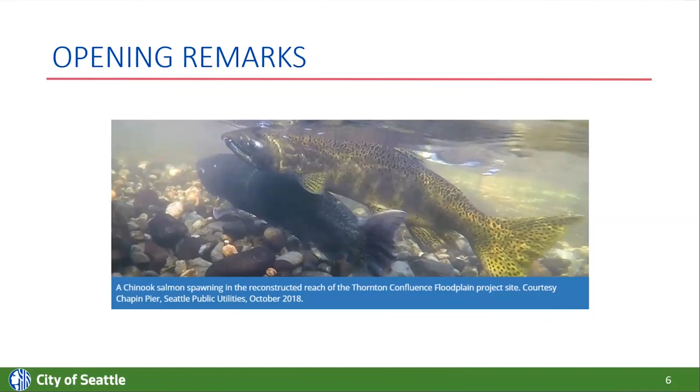All right, sounds good. We always like to start off with a little background on why we even have a stormwater code and what's in the current stormwater code. Those of you who joined us at the external code and manual user meeting back in the fall may recognize this slide. Looking at why we have a stormwater code in place, the key goals are protecting life, property, and surface waters from harm, and meeting the requirements of state and federal law.

This is a requirement under the Federal Clean Water Act, and in the state of Washington, our municipal National Pollutant Discharge Elimination System stormwater permit. Some of the key things included in the stormwater code and manual are source control for ongoing practices, construction site pollution prevention, and requirements for new development and redevelopment, which include on-site stormwater management, flow control, and water quality treatment.

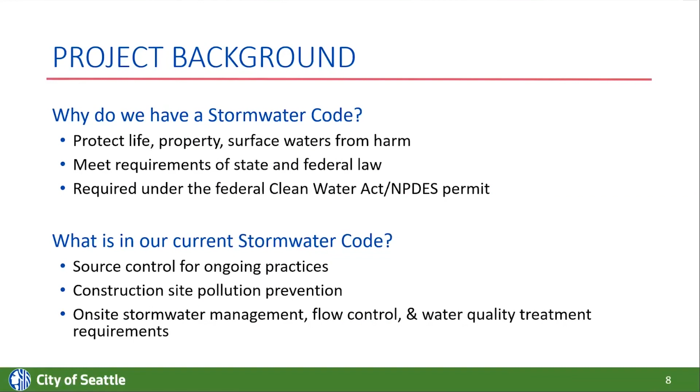One of the main drivers for this project is the new Phase 1 permit that was issued on July 1st, 2019 - I guess not so new anymore, but relatively new. It became effective on August 1st, 2019. There was also an update to the Stormwater Management Manual for Western Washington, or what we call the Ecology Manual, along with that reissued permit, posted in July 2019.

We held a series of internal city staff workshops and meetings in the summer and fall of 2019, and then had our external stakeholder code and manual user meeting last fall, which some of you attended back in October. This spring, we have two virtual public meetings. As Sherelle mentioned, today is the first of the two public meetings, and the next one will be next Wednesday, May 6th.

So the project is divided into four different phases, and we're working through the first phase of the project right now. As Sherelle mentioned, we're focusing on the required equivalency items and getting things ready for Ecology's review.

That review period starts on July 1st, so we've got to wrap everything up in the next couple months and get that ready for ecology's review.

The key thing here is looking at Appendix 10 of the Phase 1 permit and addressing any items related to ecology permit equivalency. Those include things such as new source control BMPs, updates to construction stormwater elements to reflect the 2015-2020 construction stormwater general permit, updated wetlands guidance, etc. So there's a few items there that are required changes in the ecology permit.

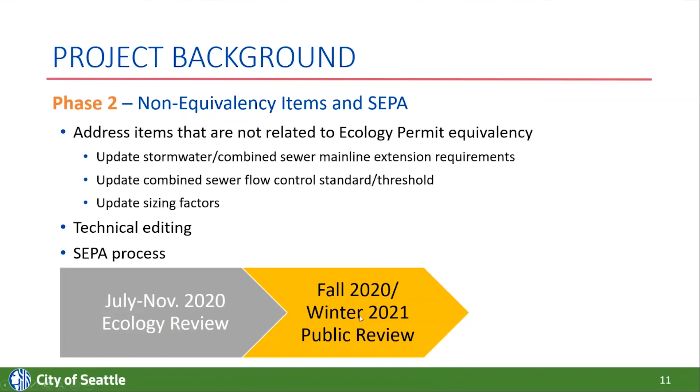Hopefully they'll get us comments back before then, but then it'll be out for public review once we're able to review ecology's comments and incorporate those new phase 2 items. There'll be a second public review period that you can also participate in, and we'll mention that again towards the end of the presentation, but that'll be either late fall or early winter, depending on when we hear back from ecology.

Phase 3 and phase 4. Phase 3 will be the legislative process and adoption, occurring in the spring of 2021 - taking things through city council review, having public hearings, things like that. Phase 4 will be looking at implementation tools. We're working on that throughout the project, identifying what types of tools would be helpful to support the manual, applicants, and plan reviewers. Those will start rolling out in the spring and fall of 2021.

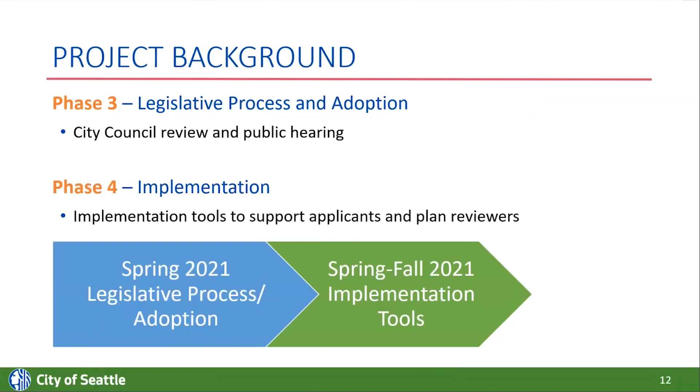Thank you, Rebecca. I just wanted to note one thing, and I apologize if you're going to go through this bit. We were talking about the time series and changing possibly the time series for the modeling, and that would possibly affect the sizing factors in the manual, but you can touch on that more later. I just wanted to make sure that we covered that.

Anyway, I am going to go over the key stormwater code changes. I'll just remind you that the authority to regulate stormwater in the city of Seattle comes from the Stormwater Code, and that's why we're starting with the code. A lot of the code is inserted into the Volume 1 manual, but the code, the Seattle Municipal Code, is where the authority is, so should refer to that if you're looking for something in particular that isn't in the manual. The Stormwater Manual, which is the director's rule, further interprets the authority in the code.

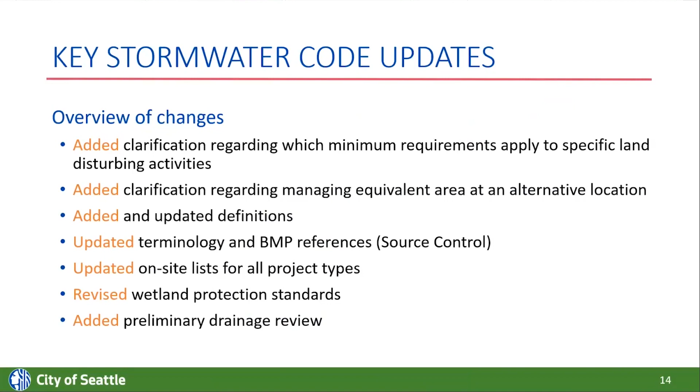As far as the title, scope, and authority goes, we've had to remove barriers to some of these retrofits or projects that are either improving water quality, flow, or removing pollutants. We've added some new exemptions from the minimum requirements for remediation projects, as well as stormwater retrofit projects.

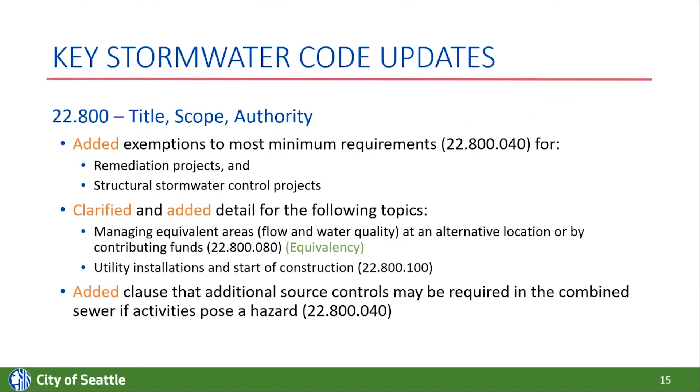In addition, we've updated this to note that ecology is asking us to add some additional language regarding alternative compliance, so we've updated that section for equivalency to ecology. We also added some clarification regarding utility installations as it relates to start of construction, and updated that source control may be required in the combined sewer area for certain activities.

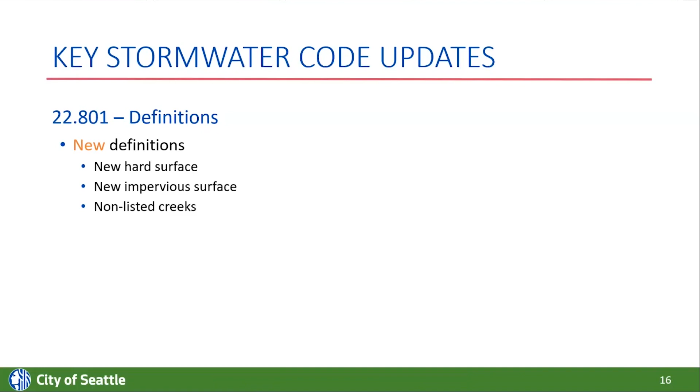So as far as definitions, I'll first go through the new ones and then the revised ones. We have added new hard surface and impervious surface definitions to be consistent with ecology, and that incorporates changing surfaces from gravel to asphalt being considered new. We also added non-listed creeks as a definition, just to be consistent in the manual, or in the code, because we have listed creeks as a definition.

We've updated several existing definitions. One is the definition for aquatic life use. Currently it has only freshwaters considered as having aquatic life use in our definition, but we've added marine waters to the definition, which will affect enhanced treatment requirements. We did a minor name change in the construction stormwater control plan definition.

We've added a definition for development, and the changes are to be consistent with ecology's definition, including adding subdivisions and short plats, and noting that development is a type of project.

We've changed effective impervious surface to effective hard surface. We changed master use permit - there was a definition in the stormwater code that was slightly different than what is in the land use code, and instead of having a separate definition, we're just referring to the land use code.

We also updated pollution generating impervious surfaces, with changes having to do with pedestrian ways being separated from drainage or from roadways, as well as making it clear that rail lines, including light rail, are also considered pollution generating. In addition, we clarified that if you have an area that is pollution generating that isn't currently going to a drainage system, but that is replumbed one way or another and goes to a drainage system, that is considered new pollution generating surface.

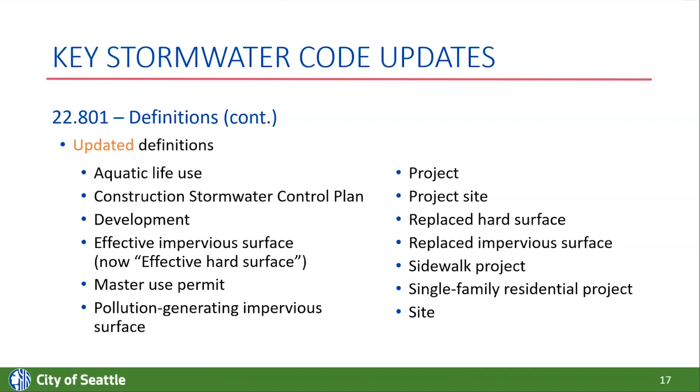For the definition of single family residential project, we added clarification that associated detached accessory dwelling units are still under the single family residential project definition. And finally, for site, we made changes to be consistent with ecology as well.

For minimum requirements for discharges, all discharges on all real properties - I first want to note that there's no changes to the prohibited and permissible discharges proposed, but for 22803, we do have a couple changes.

We added new BMPs for source control for all real properties that include rooftop dog runs, fueling associated with dedicated stations, mobile and in and over water fueling, maintenance and repair of vehicles and equipment, and concrete and asphalt mixing, production, and pouring, and a couple minor name changes in that section as well.

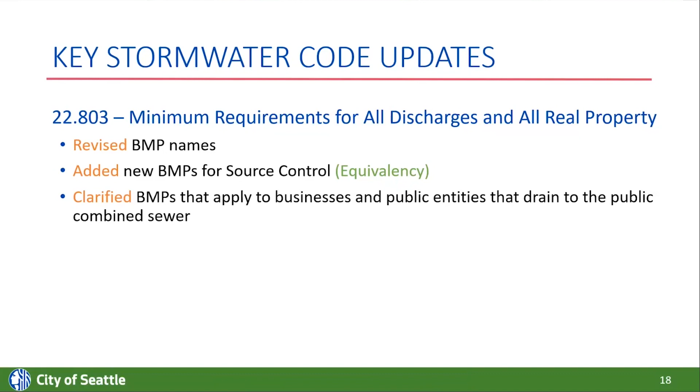As far as the overall minimum requirements for all projects, for general requirements, there's a new section related to closely related projects that may be determined to be one project if they meet certain thresholds. This mirrors other code language that is in Seattle Municipal Code, in particular evaluating SEPA and drainage review, design review.

We also added a new section clarifying drainage control plan review, making it clear that it is required for MUPs, and also looking at the entire project to determine thresholds. Additionally, we added that for certain stormwater facilities that serve multiple properties, there are requirements for those to be built ahead of those further projects being finalized.

The last two items that I just mentioned, Matthew will discuss in more detail, along with two changes in the single family, or changes related to on-site stormwater management.

In the single family project section and the parcel-based project section, the terminology when a lot size is changed has changed from reduced to altered. Other thresholds were added to be equivalent to ecology's requirements about increasing runoff during the 100-year recurrence interval flow frequency, and finally there are requirements associated with protecting wetlands, updated based on equivalency requirements from ecology.

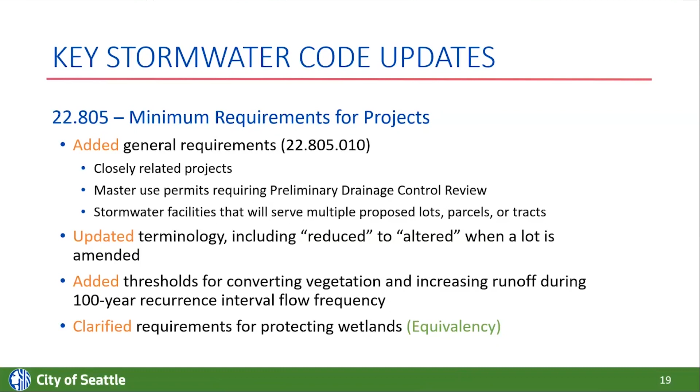For roadway projects, the proposal is to change the flow control thresholds to be based on new hard surfaces instead of replaced hard surfaces. This would match ecology's requirements.

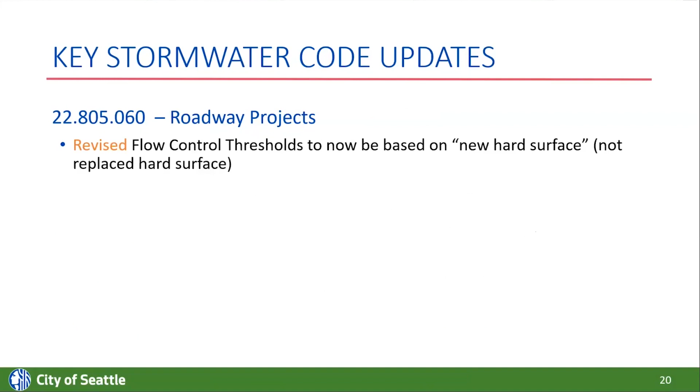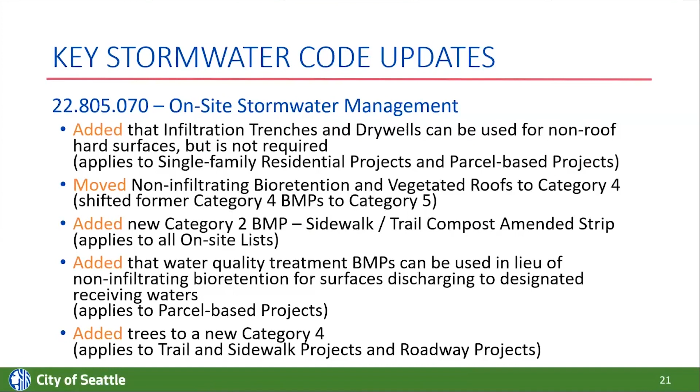Related to on-site stormwater management lists, I'll go through these quickly, but I also have tables I'll follow through in more detail. Some of these changes affect all of the lists, with changes to categories and BMPs, including adding a new sidewalk trail BMP, as well as adding trees to roadway and sidewalk trail projects as a requirement to be evaluated for the on-site stormwater management list.

This is a screenshot of the parcel-based project list, and I've highlighted in green the changes in the words I just went over on the other slide. Basically, for infiltration trenches and dry wells, it now says that for surfaces, you can use them, but you're not required to evaluate them for surfaces.

So if somebody wants to, because of pollutant concerns and the like, or long and linear projects, the requirement to evaluate for surfaces is optional as opposed to a requirement. This is consistent with ecology's requirements, and that's for ground level surfaces as opposed to roof surfaces.

Yes, thank you for clarifying that, Matthew.

For sidewalks in category 2, we added a sidewalk trail compost amended strip. This is basically similar to the CAVFS that WSDOT uses - I apologize for the acronyms - but it's a compost amended strip for trail and sidewalk projects, and it's on the same level as permeable pavement.

So this is something we need to take to ecology for approval. This is definitely proposed, but you'll find that BMP in the manual in volume 3.

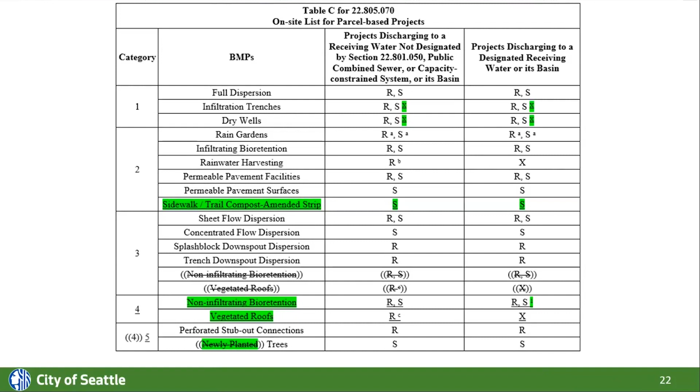And just to see what this means for roadway projects - this also would apply to trail and sidewalk projects - similarly adding that sidewalk trail compost amended strip in the same category as category 2 and permeable pavement. Again, this has not been approved by ecology. Also, at the bottom, we're adding trees to the bottom of the list for roadway projects and trail and sidewalk projects.

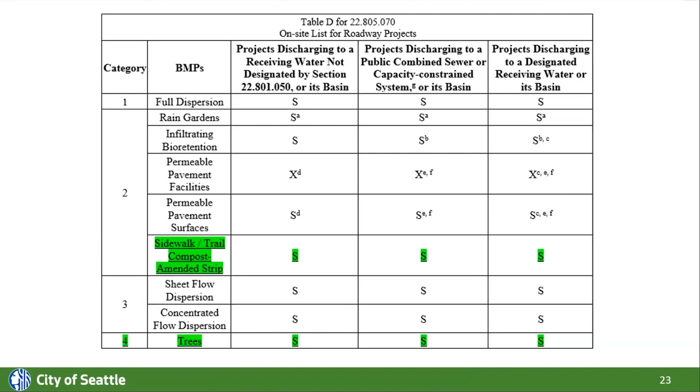So, to meet equivalency, we added requirements for wetlands based on ecology's equivalency requirements.

Most of these requirements would have to be determined by wetland biologists through a wetland report. The reason we did this is because ecology has a new method of determining what type of flow control and monitoring is required, and it's dependent on different types of class and type of wetland, habitat and habitat score, and the presence of breeding amphibians - all from ecology.

Depending on what type you have and different parameters, you might have to do method 1 or method 2 flow control. Method 1 flow control involves a year of monitoring, including wetland stage modeling, and it typically applies to class 1 or class 2 wetlands, and it has to be a depressional or riverine impounding wetland. The project proponent basically has to have legal access to the wetland to be able to do the monitoring.

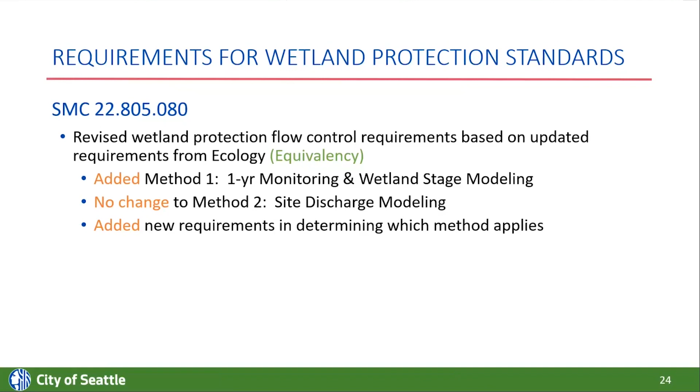And I'm almost out of time, or I'm out of time, so I'm going to hurry through this. And I think that I have my last slide here.

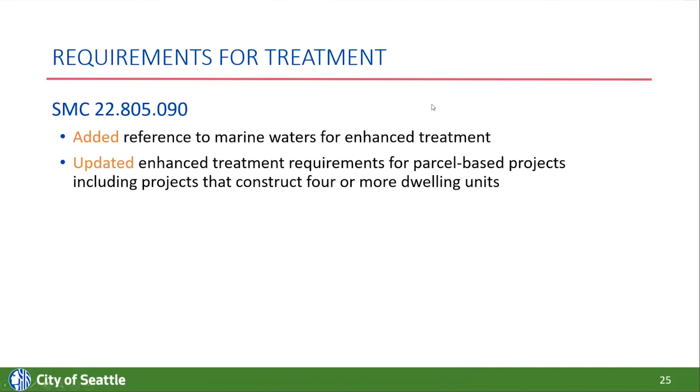So, okay, I think that is it. Thank you so much, Sherelle, for the update. Oh, I have one more. I apologize. Okay. Sherelle, you're doing fine on time. I have you at 15 minutes right now, so you're good. Yeah. Oh, okay. Okay, good. Good. I thought, never mind.

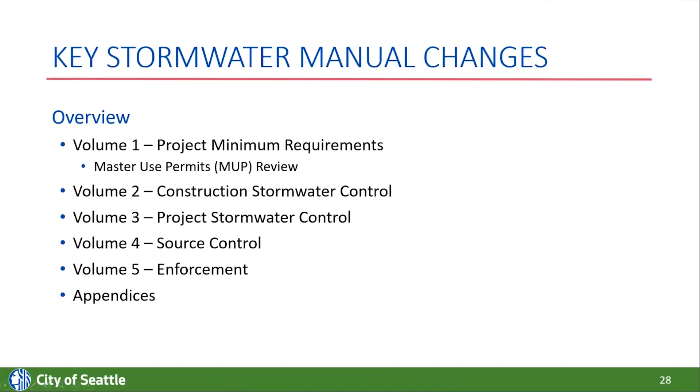And then the appendices. And Matthew will be speaking a little bit on master use permits as part of the Volume 1 update today. So some of the key changes in Volume 1, if you've had a chance to take a look at that summary of changes that's posted online along with the Redline manual files, that provides a pretty good overview, but just wanted to hone in on some of the key things that have been updated or clarified or added.

So as Sherelle mentioned, this kind of aligns with what's in the code, so clarifying definitions and providing some new examples for single-family residential, parcel-based projects, and special circumstances projects. So that expanded some of the text related to special circumstances projects in section 4.7. So if you're developing multiple blocks, if you're discharging to closed contour basins or multiple drainage basins, or discharging to subbasins within the public combined sewer system, those would now be considered special circumstances projects.

Also consolidated the requirements for land disturbing activities. So these were different project types back in 2016, and they've kind of been rolled up into one section now. So that includes utility projects, pavement maintenance projects, and then a couple new sections on remediation projects and structural stormwater control projects.

And then right now, there's a placeholder for the landscape management plan. So for those of you that are familiar with the King County Surface Water Design Manual, that section is kind of modeled after what King County has in their manual. So that's up for Ecology review as a proposed change in section 5.4. We also added a reference to BMP T5.40, preserving native vegetation. That's in Ecology's Stormwater Management Manual for Western Washington.

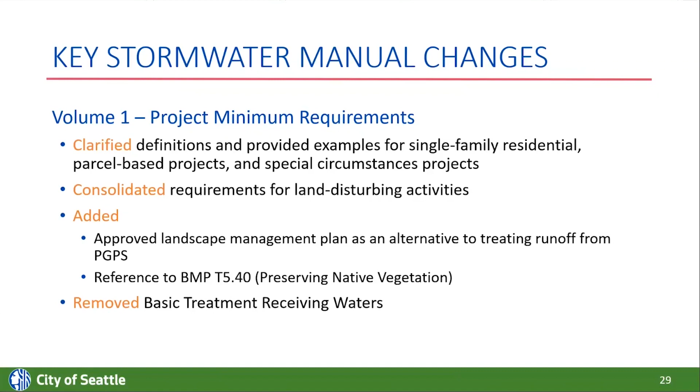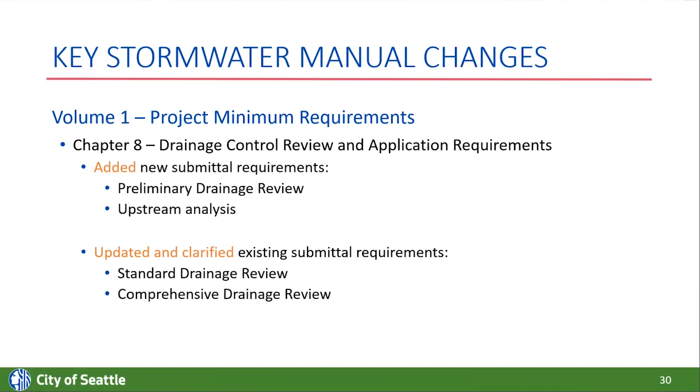In Chapter 8 specifically, a couple things that Sherelle mentioned during her presentation, related to drainage control review and application requirements. There's a new section 8.1 on preliminary drainage review. And then there's a new requirement in section 8.4 related to upstream analysis. And we've also updated and clarified existing submittal requirements in sections 8.2 and 8.3 related to standard drainage review and comprehensive drainage review. And Matthew can definitely speak to questions on those since he worked on Chapter 8. So with that, I will hand things over to Matthew to give us a brief overview on the master use permit updates in the draft manual.

Okay, so master use permits are basically just a land use permit issued by SDCI, and there's a huge range of what that permit may be. It could be a short plat, a major institutional master plan, or it could just be a sign approval. Our current code just says that MUPs require drainage review, so we wanted to provide some clarification and provide consistency of which MUPs get review, how you review them, and clarify some of the requirements.

So we've added this new preliminary drainage control review section that applies to MUPs. And we're going to clarify exactly what types of MUPs will regularly get drainage review. And we're also establishing some requirements for shared drainage facilities in subdivisions and short plats. Go to the next slide.

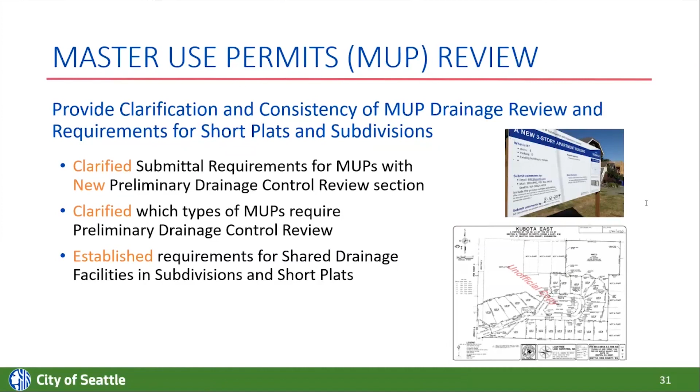So the preliminary drainage control review. We've got it in the code section here and the manual. So basically, you're going to need a preliminary site plan and preliminary drainage control plan. And that plan needs to include an estimate of all your hard surface coverage in the associated development. And that's what will be used for determining your thresholds for flow control, water quality, etc. And if applicable, a preliminary drainage report. Since there are a lot of different types of MUPs, we're planning on doing an appendix that would get into more detail for the different types of MUPs and what's expected.

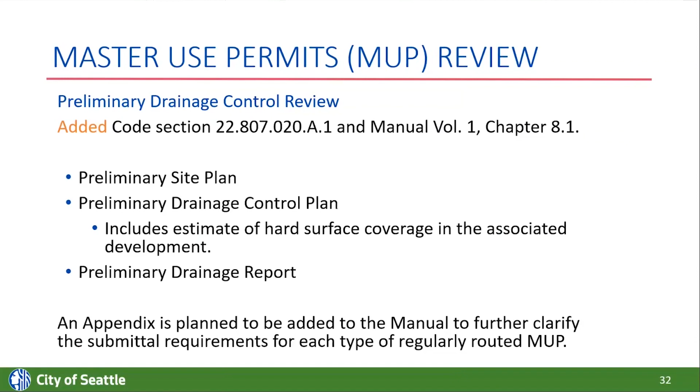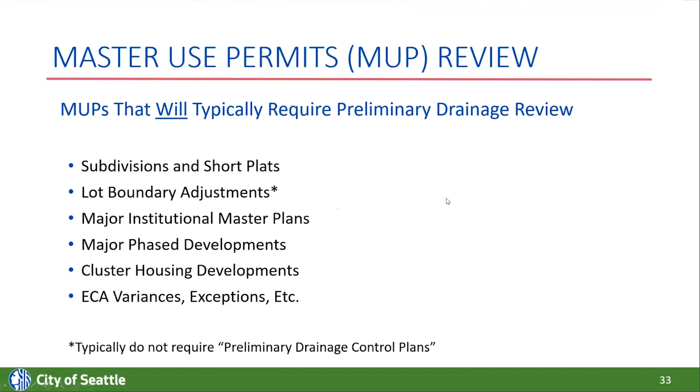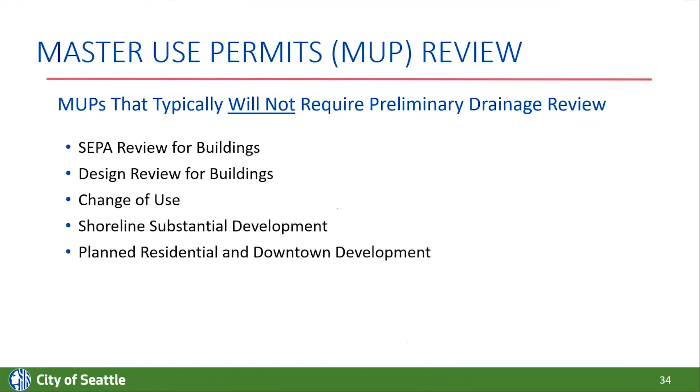And that's mainly just to make sure that huge subdivisions aren't split up and then sold off, and then people find out, oh, they can't do anything until they build this massive detention tank. And so that sums up my part of the MUP, and I can take more questions later.

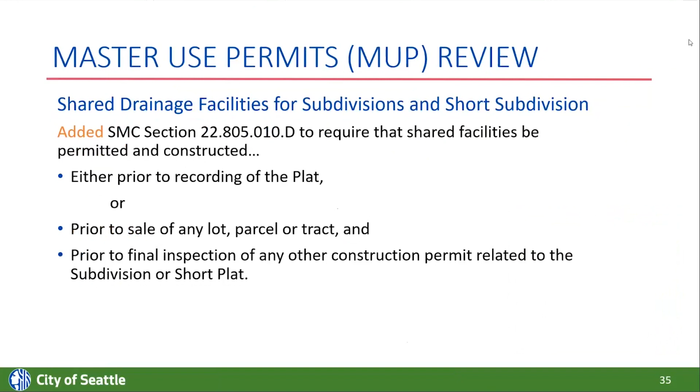Great, thanks, Matthew. So now I'll shift to talking about the Volume 2 updates. So Volume 2, the updates were relatively minor. A lot of those were related to terminology consistency and minor BMP revisions for consistency with Ecology's Stormwater Management Manual for Western Washington. If you're interested in specifics, you can take a look at that summary of changes table that I mentioned that's posted along with the manual red lines, and pages 6 through 8 focus on the BMP revisions.

I guess the one larger one was the split of 2 BMPs, so concrete handling and concrete washout area were lumped together in the previous manual, and those were divided out for consistency with Ecology. So those are now C 1.56 and C 1.58. Along with Volume 1, there were also updated internal or external web links and other minor terminology updates and clarifications throughout Volume 2, but relatively minor changes there.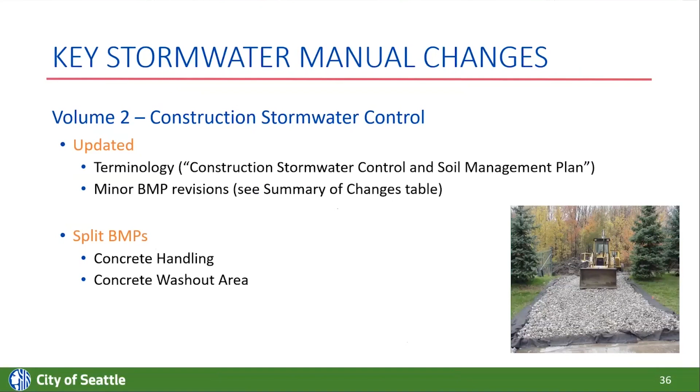Volume 3, some of the key things that were updated included some guidance related to the infiltration investigation map. So there was some confusion on how that might be applied. So in section 3.2, some clarifying language was added there to describe how that should be applied. Bypass flow through and offsite flow general design requirements for online and offline BMPs. Those are clarified in section 4.2, and some updates have been made there.

We added some modeling guidance for projects that are located in closed depressions, and that can be found in section 4.1.3.4. And then, as Cheryl mentioned earlier, there's the new BMP in chapter 5, sidewalk and trail compost amended strip. So that's something that's proposed to Ecology that we're hoping to get adopted.

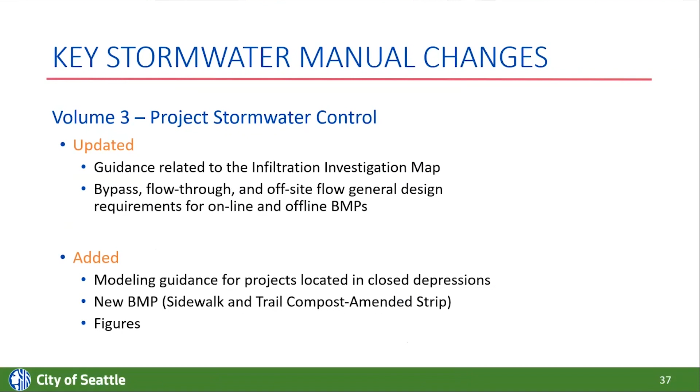And then figures are listed here under added, but there's also updated figures as well. So that should probably appear in both categories, but there's a set of red line figures that are posted primarily in chapter 5 of volume 3, and you can take a look at the changes that are proposed there. They're in the red line format, so they're a little messy now, but in the final manual, they'll be cleaned up in CAD and they'll look a lot nicer, but this way you can tell what's being proposed for changes.

Clarifications in Volume 3 include the minimum investigation and testing requirements for shallow infiltration BMPs. So Table 3.1 has some updates in it. Also some clarifications to how you would implement the on-site list approach in Section 3.3.1, the on-site performance standard in 3.3.2, and flow control in 3.3.3. Some clarifications on the modeling approach in Chapter 4 in Section 4.1.3. And then clarification on pre-settling and pre-treatment requirements in Section 4.4.

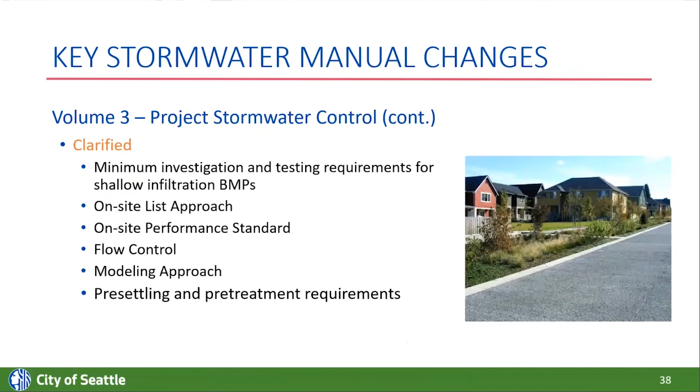The next 3 slides are just intended to be an overview. There were a lot of changes made throughout the BMP sections for clarification and terminology and updates to design criteria. You can take a look at the summary of changes table, page 9 through 13, for more information. The next 3 slides just highlight where some of the changes are, in columns: site considerations, design criteria, modeling guidance, operation and maintenance, and figures.

The second subset of BMPs is listed here. Again, lots of changes throughout the design criteria for clarification and updates, changes to the figures and O&M were some of the key areas here.

For detention pipes, we wanted to call out specifically a few changes you may want to take a look at. We clarified what is required for manifolded detention pipes, so minimum 24-inch diameter connections - you can take a look at that on page 5-160. The access requirements for detention pipes and any underground structure have been updated throughout Chapter 5, so there are new and updated requirements there, and also requirements related to exfiltration testing for detention pipes, under the minimum construction requirements on page 5-162.

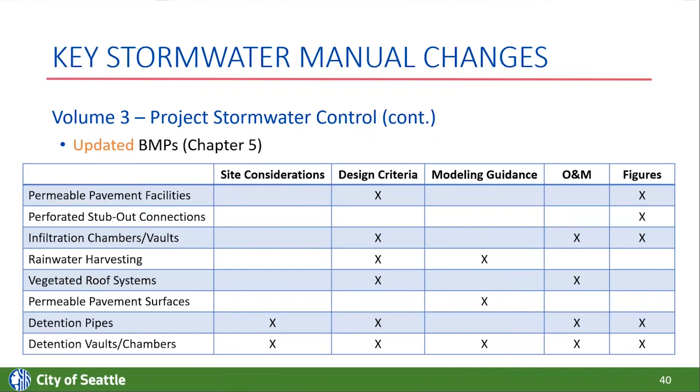On this third slide, the subset of BMPs we have are kind of the water quality treatment or non-infiltrating BMPs. Changes in the site considerations, design criteria, and figures were the main aspects here. For non-infiltrating bioretention, we wanted to highlight that a liner is now required, so that's a section you may want to take a look at, on page 5-181.

A few BMPs not listed here: biofiltration swales and stormwater treatment wetlands only had minor edits related to terminology and consistency with the Stormwater Management Manual for Western Washington, and combined detention and wet pool facilities did not have any edits, so it's not listed here.

You'll note on the matrix that there were some changes in the proprietary and emerging water quality treatment technologies as well. One technology had been added, but it wasn't added consistently throughout, so that got added in that section. I think that's my volume 3 in a nutshell.

Obviously, lots of changes throughout, but hopefully they're pretty clearly identified in the red lines and in the matrix to help focus your review.

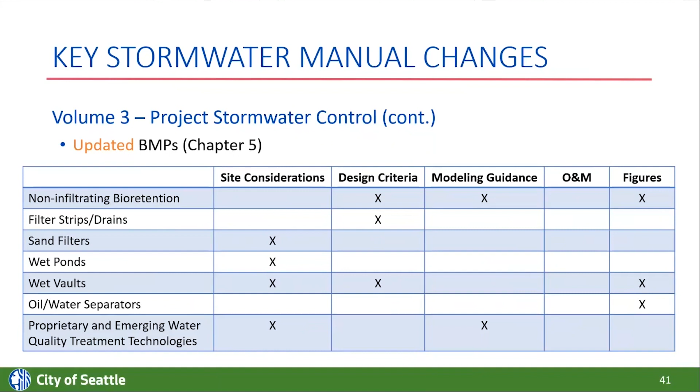For volume 4, that's focused on source control. We updated, clarified, and added required BMP elements and recommended BMPs. Again, a lot of that was driven by updates in the Ecology manual. One BMP that was added, that Cheryl had mentioned, was the rooftop dog run BMP, new BMP number 8. That's something that's not in the Ecology manual, but is a city-specific BMP.

And one BMP was removed, the lot maintenance and storage BMP, because a lot of that was already addressed under BMP 7, and it seemed kind of duplicative to have a separate BMP for that.

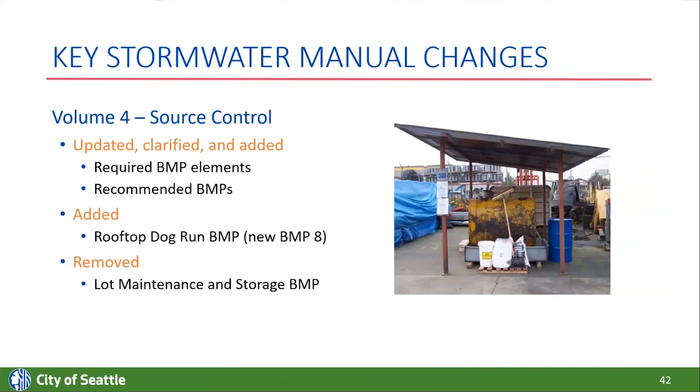So Cheryl mentioned some of these earlier, but I wanted to list them out here. These are the 8 BMPs that were shifted from Chapter 3, which was business and public entity BMPs for specific activities, and these got moved up to Chapter 2, which is BMPs for all real property.

There are a few focused on fueling. BMP 11, in-water and overwater fueling, doesn't have any city-specific requirements, but refers you to the Ecology Stormwater Management Manual for Western Washington. There's a couple related to concrete and asphalt production and application, and then maintenance and repair of vehicles, equipment, storage of liquids and above ground tanks, and recycling, wrecking yard, and scrapyard operations. There were some BMPs that seemed like they should still have requirements for all properties in the city, so those got moved up to Chapter 2 and will now apply in more cases, in more projects.

Rebecca: I just want to point out that these aren't just going to be for all real property, but these previously weren't required in the combined sewers. Response: Right, so these will now also be required in combined sewers. Good to define that all real property is basically your separated system and your combined system, and then once you get into Chapter 3, that's just looking at the separated system.

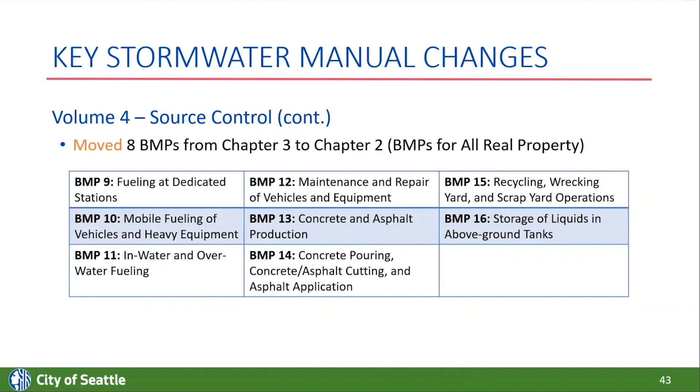As we mentioned earlier, Ecology added quite a few source control BMPs to their source control volume, so those got added here. Most, or I think all, of these are actually just references to Ecology's manual, so instead of repeating the same text, it just provides a reference to the 2019 Stormwater Management Manual for Western Washington for specifics.

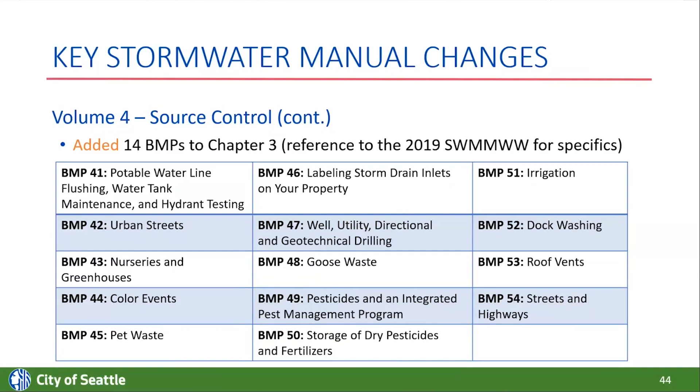That's Volume 4. I mentioned that Volume 5 right now is just a placeholder page, so that'll be available in the next round for public review.

I wanted to briefly step through some of the key changes in the appendices. Appendix A right now doesn't require too much review, just a placeholder page—take a look at the draft stormwater code to see what those definitions are, and we'll reflect those in the final manual as well as the code.

Appendix B is one where the content got deleted because currently we're referring to Ecology's BMP C250, so it's kind of duplicative content. It didn't really make sense to update it since we default to Ecology's BMP there. So we deleted the content, but as Matthew mentioned, we'll be updating or keeping Appendix B, but in the future it'll be submittal requirements, and we'll be working on that as part of Phase 2. That'll be out in the fall for review.

Appendix C has some changes here—new infeasibility criteria for consistency with the on-site list calculator. There are also some new infeasibility criteria for all BMPs: BMPs that would require pumping is now an infeasibility criteria; if you're unable to maintain 36 inches between the BMP and the property line for a side yard setback; and if you're unable to maintain clearance for ingress, egress, or ADA pathways.

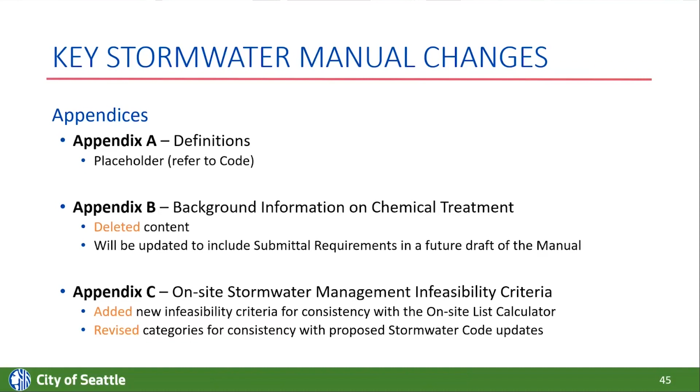Take a look at those—there are a few changes there that would impact projects, and would be good to have in mind moving forward. There are also some revised categories for consistency with the proposed stormwater code updates. As Cheryl mentioned, things got shifted around a little bit in the list, so Appendix C also got updated to reflect those shifts.

For Appendix D, that's looking at the subsurface characterization and infiltration testing for infiltration facilities. Here we clarified the roles and responsibilities of licensed professionals in the first section, D1. We also updated documentation requirements and infiltration testing procedures in sections D2 and D3, added a requirement for vertical separation for groundwater mounding in D7, and added acceptance testing criteria requirements and submittals in section D8.

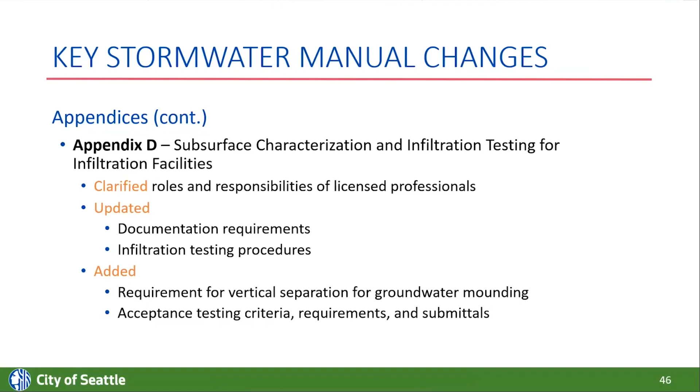Related to the documentation requirements, those got updated for most types of reports that would be submitted—that includes the simple subsurface investigation report, the standard subsurface investigation report, and the comprehensive subsurface investigation report. The acceptance testing section, D8, is a new section—all new text there. We worked with a couple of geotechnical professionals on making the updates to this appendix.

In Appendix E, that's our placeholder where there are a bunch of additional design requirements related primarily to Volume 2 and Volume 3. We updated and clarified design criteria in sections E1, E3, E4, E5, and E6, clarified when each type of liner applies in section E7, and added a new figure—rectangular notch, sharp-crested weir—which I think was actually in the 2012 manual, not there in 2016, and now it's back again in 2021. Impermeable liners got added in section E7, and some general planting design principles got added to section E9.

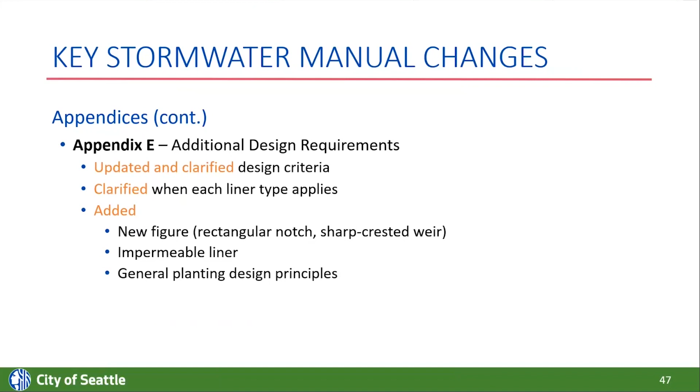In Appendix F, there aren't a lot of changes right now, but a couple of things I wanted to highlight. There's a note in there regarding the approval status of MGSFlood—as you may have seen on Ecology's manual and website, it's not currently approved for modeling bioretention. So there's a note in Appendix F regarding that, and I believe I also added that to Volume 3, just as a reminder that it's still not approved for modeling bioretention, but you can use it for other BMPs.

There are also notes regarding the evaluation of tidal influence, sea level rise, and climate change, and that work's currently in progress. We talked about that a bit at the end of the code discussion and as we transitioned into the manual slides—right now the city is evaluating replacing the 158-year precipitation time series with a 40-year precipitation time series, and also evaluating a perturbed 40-year precip series to look at future climate scenarios. That work is in progress and will be incorporated as part of Phase 2 if we decide to move forward with any changes there.

Also updated the runoff curve number table for consistency with the Stormwater Management Manual for Western Washington. Not sure how many of you still use curve numbers, but they're in there and the table's been updated. That's Table F18. And similar to the other volumes and appendices, the internal and external references and web links have been updated throughout.

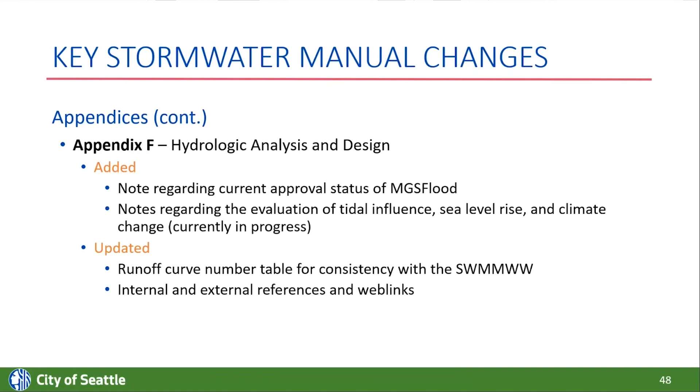Appendix G, some pretty minor edits here. This is the operation and maintenance requirements. We added the modular wetland system O&M table. Right now there's other proprietary BMPs in there, and this one got added, so we added a table in Appendix G related to that. Also some usability improvements in Appendix G, so there's now clickable links and a table of contents at the beginning to make it easier to navigate through that appendix. And with adding that new table, things got renumbered toward the end. Some other minor terminology and reference updates as well.

Appendix H only had one minor edit, so you don't need to worry too much about that. Appendix I, the integrated pest management plan, had no changes, so no edits there.

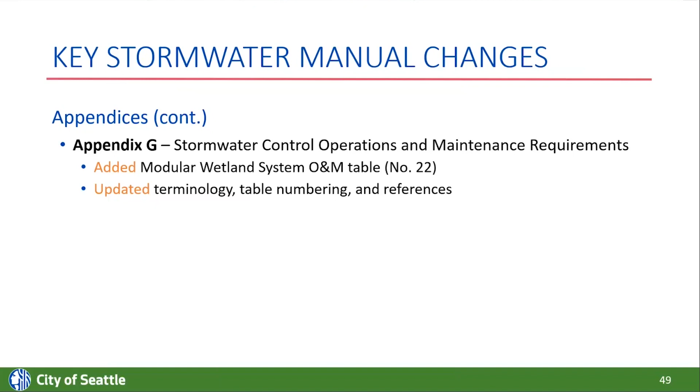And I think that is my manual and appendices in a nutshell. So hopefully that was a good overview, but definitely take a look at the red lines available online and the summary of changes document, and let us know if you have any specific comments on any of the edits proposed.

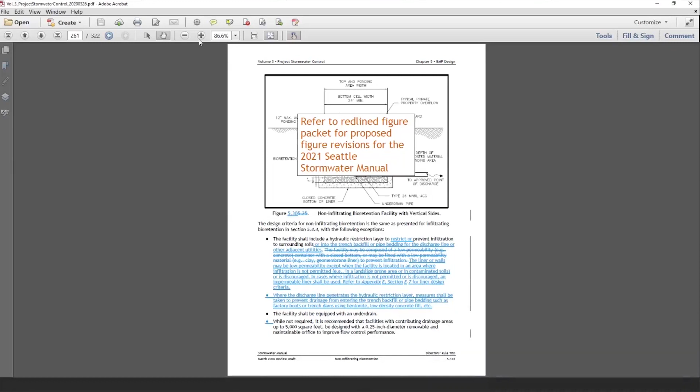Now, if you're far enough away from a building, this section shows that you can use a low permeability liner, which could even be a clay liner. I'm double checking now. Yeah, I think that's good.

I think the crux of it is that if it's next to the building, having some type of impermeable liner is the bigger change. And we've classified that concrete is not an impermeable liner, it's a low permeability liner. So we have to look at steep slopes and things like that as well, is where this would play into it. Is that correct? Yeah, I think that covers it. Thank you, thanks both.

The next question we have is from Dan. Is there a publicly available rationale memo for the compost amended soils being proposed to ecology? Not yet, no. It's in the works, but it is not available at the moment. But it will be.

Another question here from Payal. Also related question: drainage system is deleted for BMP number 2 under 22.803.030B, and volume 4 BMP2 has added language on public combined sewer. Are those changes for BMP2 different than the rest of chapter 2 BMPs?

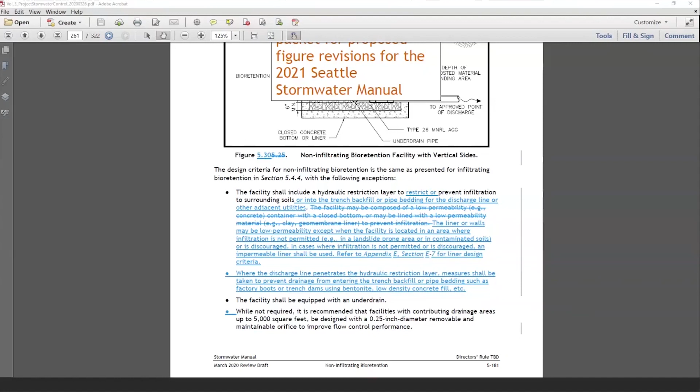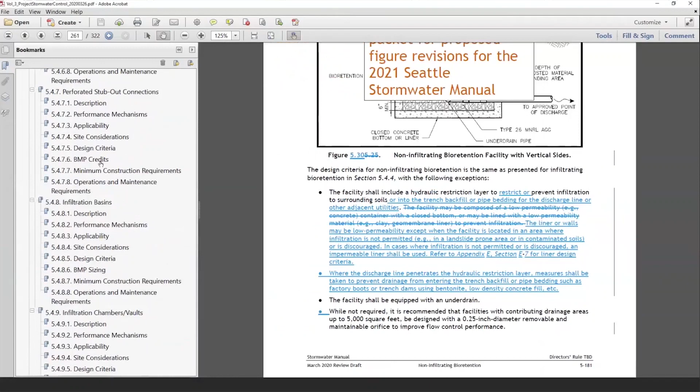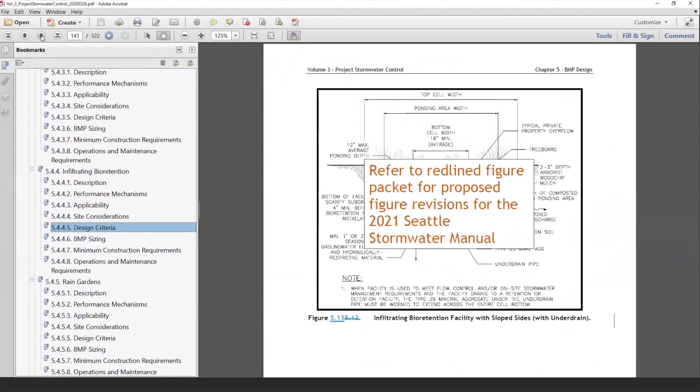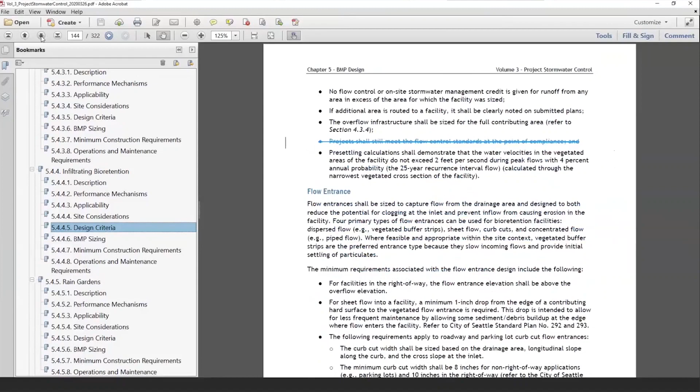I'm not exactly sure of the question, so Matthew, do you know? Yeah, so a catch basin, like if you have a catch basin that's downstream of a bioretention, I think we clarified in here that would be required. So private catch basins, there's some leeway of what that is, and that's actually defined in the side sewer code, or the side sewer director's rule. We are pretty flexible about that as long as it has a sump. But a private catch basin could not be in the right of way. So I think Lily's probably asking about zero lot line projects, where this could be a little bit tricky.

Thank you. The next one: groundwater mounding language is not consistent with ecology. We would like more information on the basis for requiring the mound to remain 3 feet below the facility. Sherelle, Matthew, Rebecca, anything you want to add there?

I don't, well, Rebecca might have more, but I feel like there was a lot going around that. I feel like that was Ecology that made us do that, but I have to look at that further. We had a big, long discussion with them about that, but we can definitely check on that. Yeah, I don't have the answer off the top of my head, but we'll definitely add that to our list to take a look at.

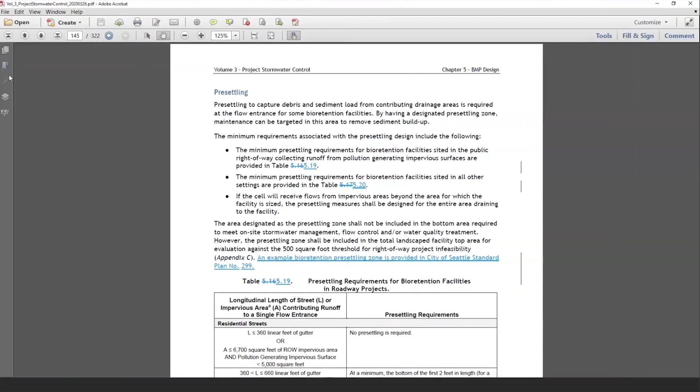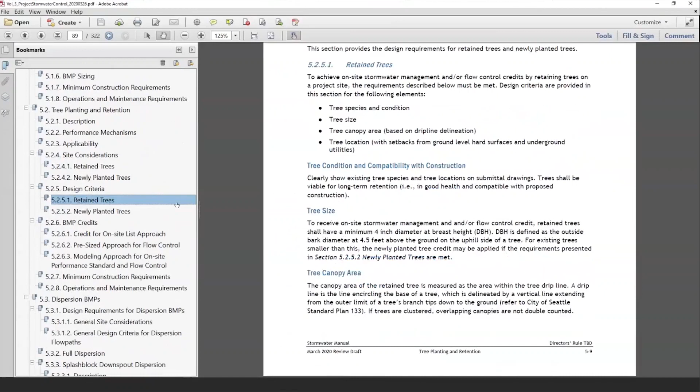Yeah. Great. Next question from Jennifer. For the trees BMP, does that also apply to preserving existing trees? And if so, is there a minimum caliper diameter? Yes, and yes. There's a retained trees and new trees. But yes, the retained trees has a caliper and what counts for it and different types. And then in the right of way, there would be feedback from urban forestry if we're talking specifically about the right of way. But yes, that is included in the code, in the manual already about tree size and caliper.

Next one from Payal, just to clarify, do Volume 4, Chapter 2 BMPs apply to combined and separate systems, and Chapter 3 BMPs apply to separate systems only? Looking for confirmation to understanding which source control BMPs apply where. I'd have to get back and look at that and double check. I wasn't a lead on that. So I don't know if Rebecca knows the answer.

Yeah, I've done a lot of training on Volume 4, and that's the way that I've interpreted it, and I believe the way that the Volume 4 lead has outlined it as well. So Chapter 2 would be anywhere in the city, combined or separate, and then Chapter 3 would just be separate systems only. So that's correct, how you have written. Thank you.

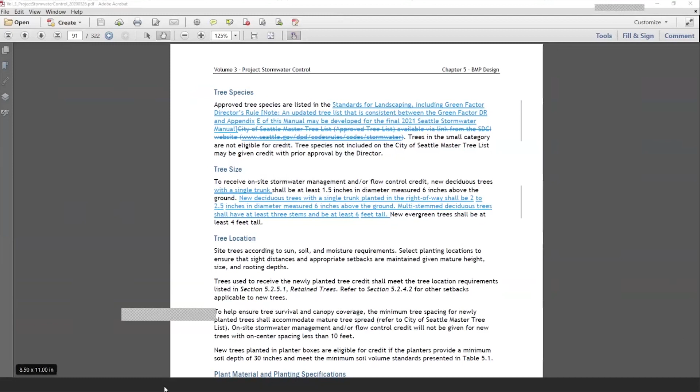Great. Those are the only questions that we've gotten so far via the chat function. We do have some more time to take any more questions that folks have, either if you'd like to raise your hand or submit additional comments, questions via chat. Rebecca, Sherelle, or Matthew, anything that you didn't have a chance to say that you'd like to circle back with the group on?

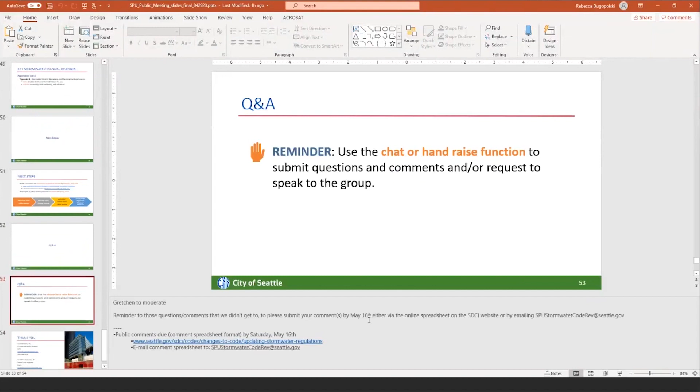Only that I just really want to hear what people have to say and if they can really articulate their comment, but also suggestions are really appreciated. If you have a way of phrasing something, or something in general, a different way of doing something, please articulate that very well. That helps us a lot, and it'll get closer to what you're looking for oftentimes. So.

Great. And then there's a request here from Robin if we're able to send the Q&A after the meeting. This whole presentation has been recorded, and so we'll be posting it to the SDCI website. So you'll be able to access the Q&A portion after this call on that. Yeah, and I see that some people haven't had the chance to review the actual changes yet, but like I said, we're going to have our second public meeting, which is going to be covering the same topic and same information. So if you, in the meantime, have time to look at something and you want some clarification, you can come back.

And another question did come in from Bailey. For non-infiltrating bioretention planters, the updated figures show that bioretention soil thickness can be reduced to 12 inches. Is there a different approach to sizing criteria for this? Rebecca, do you know, or Matthew? I don't know. I don't think we've looked at that yet since we haven't done the sizing yet. Is that right, Rebecca? Yeah, I believe we made the edit in the text, but the sizing hasn't been updated yet. So that's a good reminder to take a look at the 18-inch as well as the 12-inch. So that would probably impact the pre-sized flow control, I would guess.